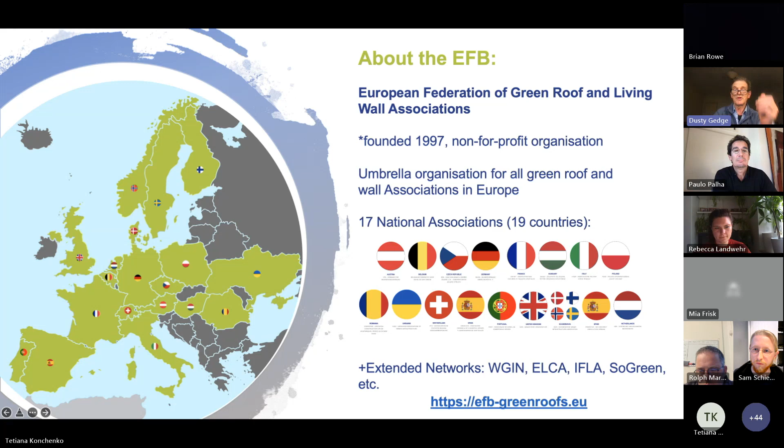Could I get that slide? That is the Federation, so you understand who we are. We're the European Federation of Green Roof and Living Walls Association, founded in 1997. It's not for profit, and it's an umbrella for all the national associations that exist in Europe. We've got 17 national associations in 19 countries, because we have the Scandinavian Association, which wraps up several of those countries. We also have extended networks with WGIN, ELCA, IFLA, SoGreen, etc. There's a link to the website, efb-greenroofs.eu.

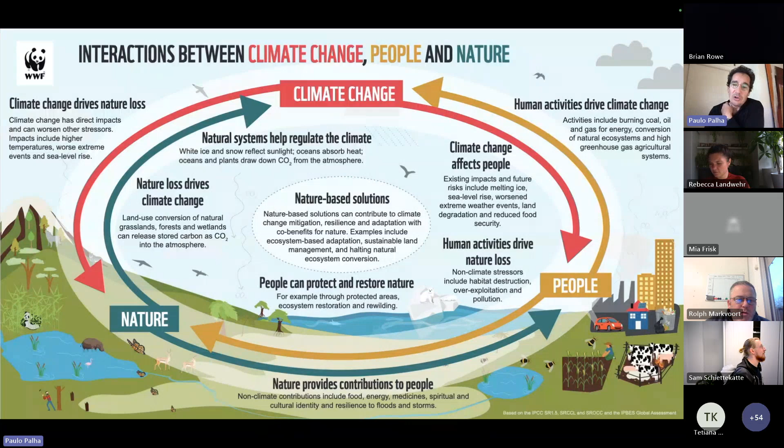We are interdependent, and all the presentations that we will see are really about these links between nature, people, and climate change. This is interlinked, and we feel the consequences very tough in this moment.

In every project, maybe some people say, oh, the city is too dense, it's impossible to change. But my message is that it's possible, and not only possible, it's mandatory to do it right now, because the goals that we have for 2030 and 2050 will be achieved in each of the projects that we are doing now, every day.

So we have a social and environmental responsibility as engineers, as architects, as landscape architects, urbanists, biodiversity experts, and so on, to address these issues in our cities.

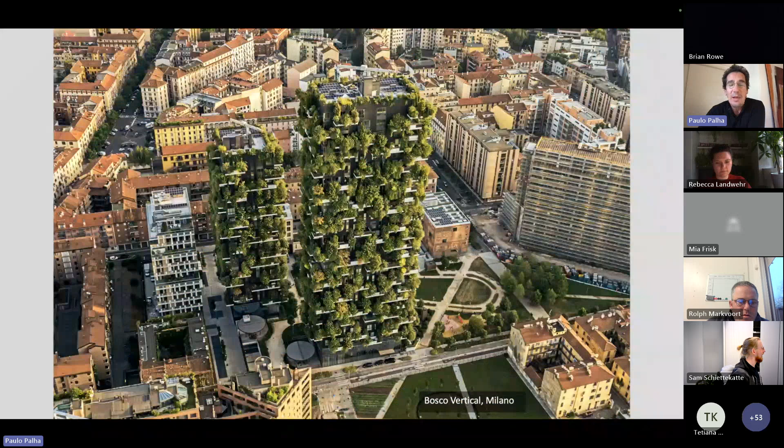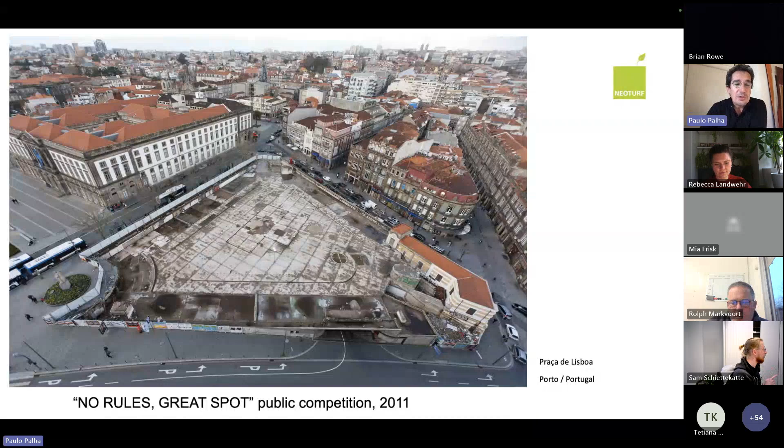Also, as we see here in Praça de Lisboa, that was an ugly place without any square meter of vegetation. And at the end, what we have right now is a big natural area, one of the most visited sites in my city, in Porto.

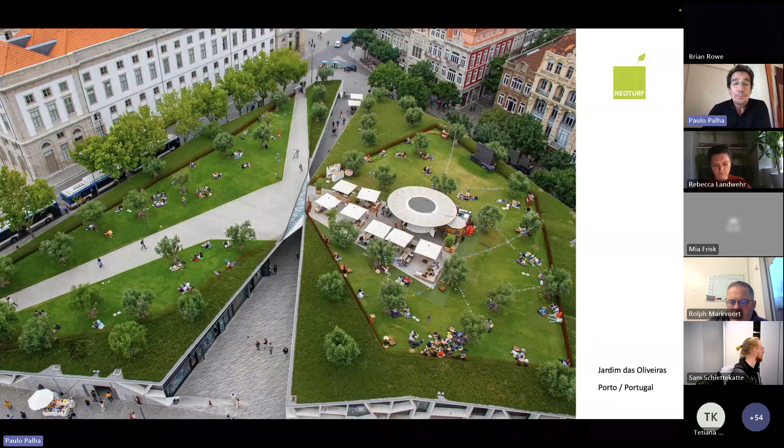So what I bring you today are first of all these important conclusions: we really need to do it right now. Otherwise, the problems that we are facing as a species, as Homo sapiens—we are just one more here on this planet—will be very tough for us, and can have really bad consequences on our way of living.

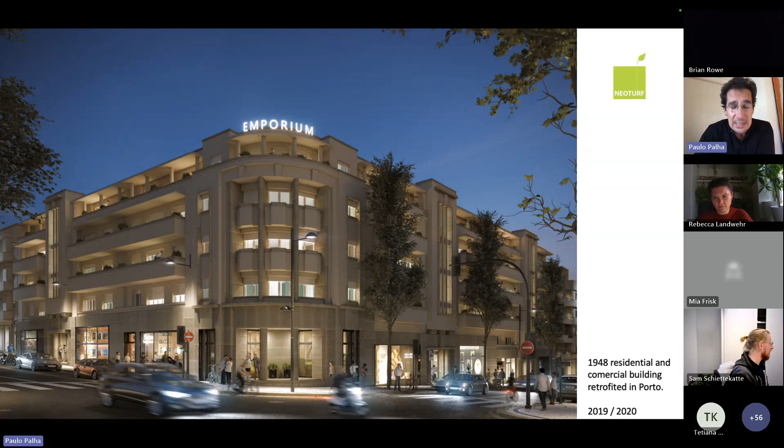Okay, reaching this project, Emporium. Emporium is in the city center of Porto, an old building, a very beautiful building that was bought by a real estate investor, and the idea for him was: okay, I have 25% of this courtyard, with these ugly garage covers inside, and I want to do something different.

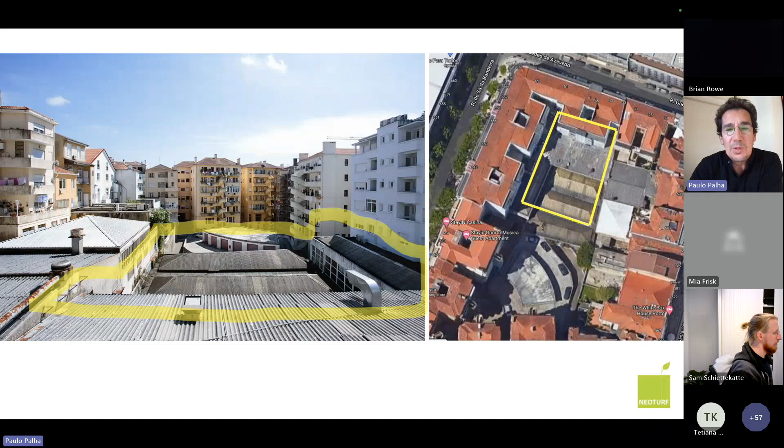I want to bring nature inside this plot, and this must be part of the sales strategy for this new development, but it is a refurbishment of a very old building.

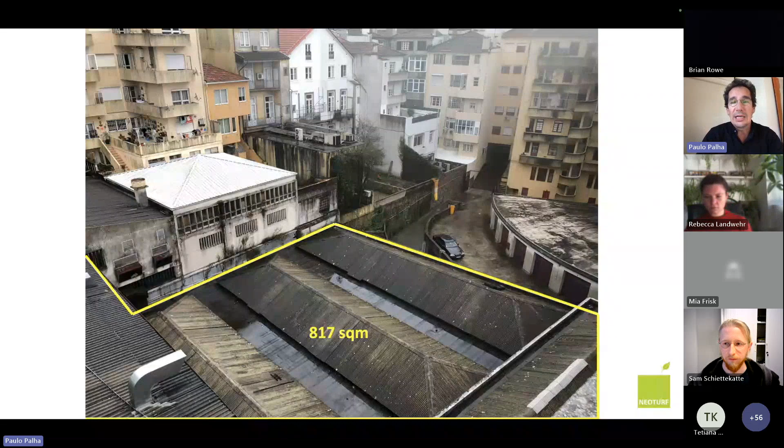So we had a little bit more than 800 square meters. First of all, we engaged very closely with the structural engineers to understand how this could be possible, and also to understand the loads that this slab can handle in the different places of the slab.

So this could really inspire our design. And this is one of the first messages: sometimes we try to force the structural engineers to give us some structural ability, but the most clever thing is to work with them and understand the ability of the slab we already have, and inspire the design of the garden in line with these possibilities.

So we understood very clearly in the first drafts where we could put the biggest trees, because we could have a pillar behind this part of the slab. All the design was inspired by the building, the age of the building, and a little bit Art Deco too, but mostly inspired by technical issues like the load ability of this slab.

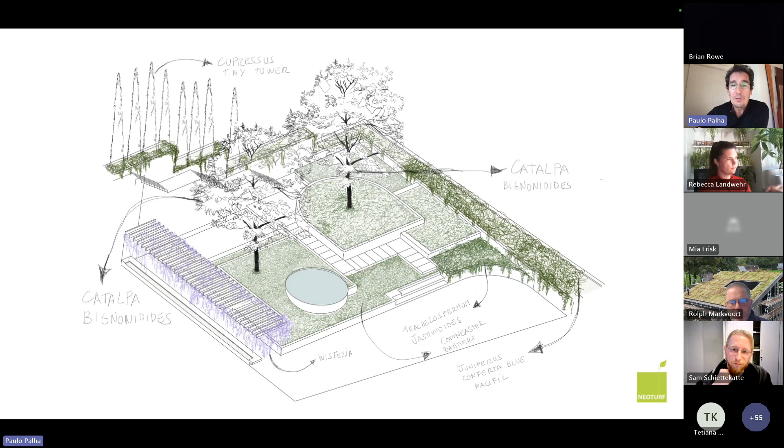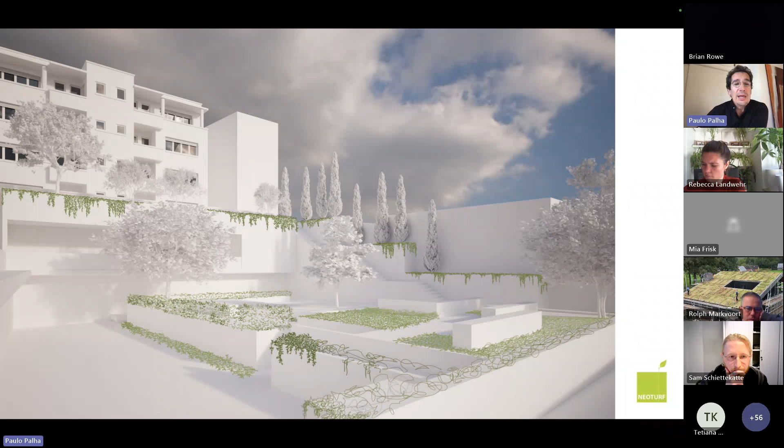So we were trying and making sketches of the possibilities that we had, always in line with this in mind. The idea was really to develop a garden that could address the feelings of nature in the different seasons - a lot of flowers in springtime, autumn colors, very green in the summertime, and also to have shade and a cooling effect for the city.

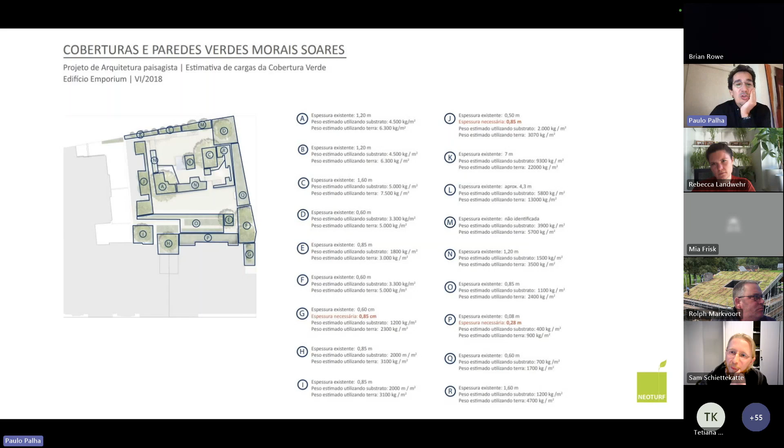Here I can share with you this slide, also from the beginning of the process, when we were having discussions with engineers and architects, to give you an idea of the amount of substrate we were using, the depth of the profile, which was between 1.6 meters and 0.6 meters, so 60 centimeters, and also the loads that we needed to really talk about and see if this was possible.

Also, a big question since the beginning was the drainage, how we could do it. We presented two possibilities. One was a linear drainage, building everything over a drainage board that could handle all these structures.

And the other possibility was to work with these plantation areas as individual plots with their own waterproofing and their own water outlets. What prevailed at the end, and what was better for the hydraulics and also for the construction, was to do it in an independent way. So we used linear drainage systems inside each of these plots.

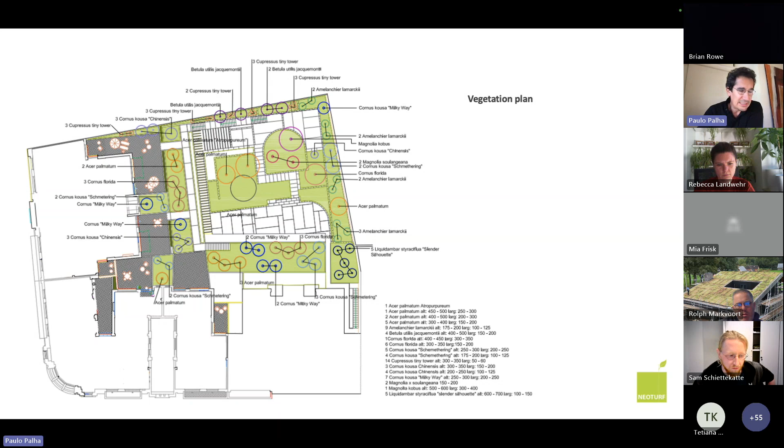We also started developing the botanic scheme, very inspired by the seasons, but also very inspired by Porto - the local botanic, or the usual botanic, even if some species are a little bit exotic, but very much with a seasonal aspect. Then we developed the first 3D images.

These are 3D images just to support also the sales team. We started presenting the concept of the building, and it was a huge, very good reception on the market. It was almost sold out when these images started being presented - only some shops on the street level were still available to buy. So this was really a very good strategy for the real estate company.

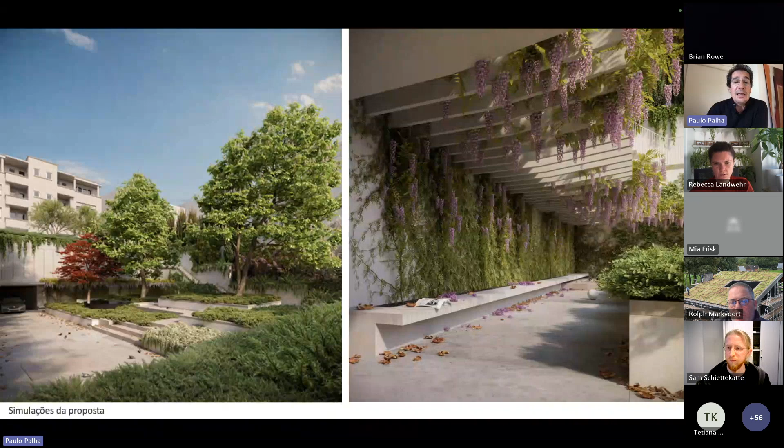This is something I would like to highlight: nature-based solutions are very important because of the ecosystem services we need, but they can also be a very good strategy for the economic value of the properties, as was the case here.

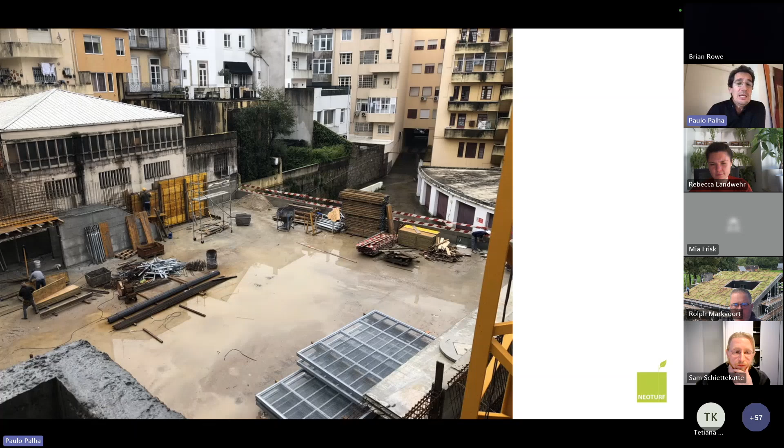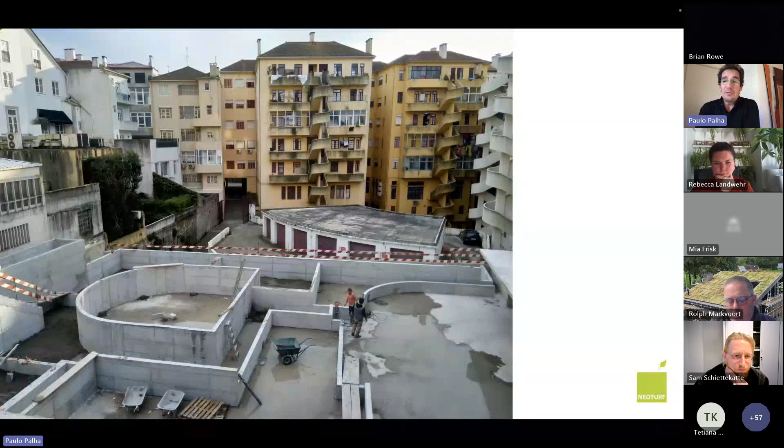The beginning of the construction had a lot of rain, but as you see, we start seeing structures with the design of the garden we proposed - the big tanks, the big plantation areas already in place, and the openings on the walls that allowed us to make connections not only with drainage but also with lighting and irrigation systems.

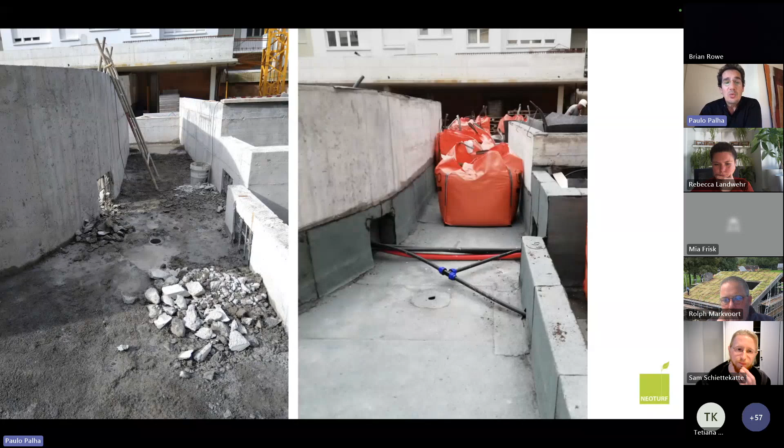After this, the waterproofing was done - a 2-layer asphaltic waterproofing with an anti-root last layer. Then the first thing we did was install a protection mat over this waterproofing.

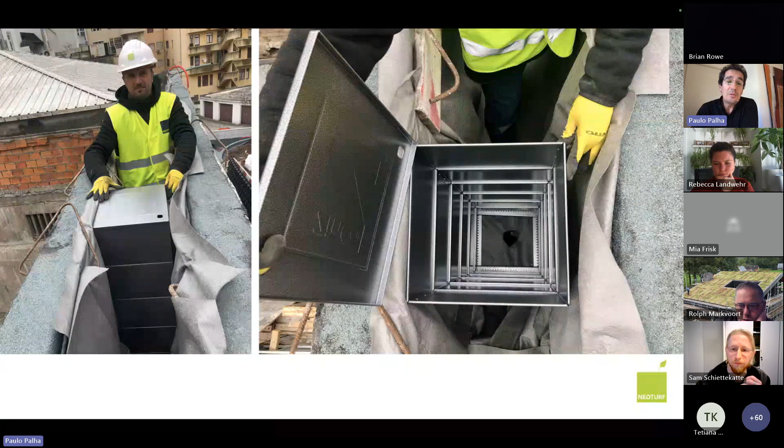Then inside each of these plantation areas came the drainage element, and in each of these areas we wanted at least 2 water outlets - even if it's very small, we always want at least 2 water outlets available. All the outlets must also be visitable, so we can understand if everything is draining properly, if the water is going out as it's supposed to.

Here you see the substrate arriving. We didn't use soils - as you know, multi-layer systems must avoid large amounts of clay, fine particles, and silts. Small particles less than 0.063 millimeters in diameter can clog the filters and cause big problems in the medium-term future. So we avoided this with technical substrates completely free of this type of particle, adding some mineral and organic parts, in line with the FLL guidelines.

We just changed here in Portugal somehow the granulometric curve - we have a little bit more fine particles, and also more organic content in these intensive green roofs.

We work with a little bit more organic approach than is stated in the FLL guidelines. By our experience, it works better in our climate conditions.

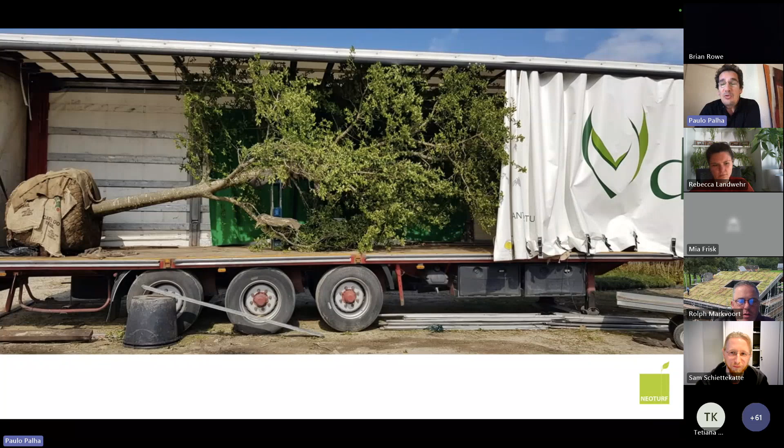Then the big elements, the vegetation, started arriving. It was very emotional because people were in the first lockdown, really inside their flats without the possibility of going out. They started seeing big trees arriving on the spot, and so many people were clapping on the windows and taking photos of what was happening inside this courtyard, because for the last 70 years they just looked at gray and ugly areas.

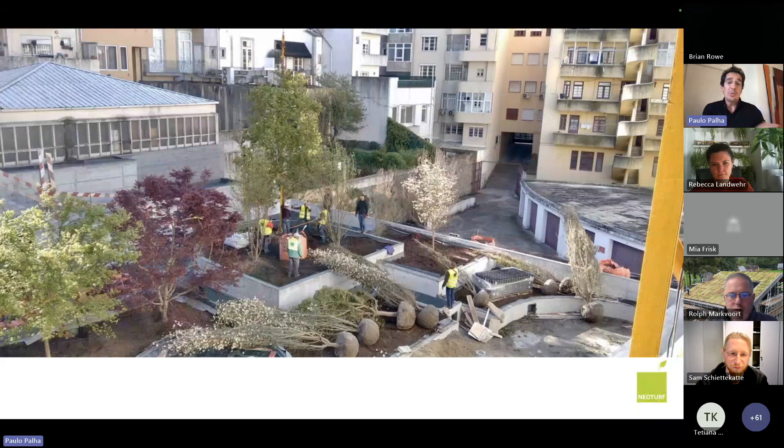It's important to highlight that these big trees were prepared for months with the client. Even before the completion of the construction, the vegetation was already being prepared, because transplanting these big ones is always a big challenge. We were lucky because we didn't lose any of them, so it was 100% a success of transplantation.

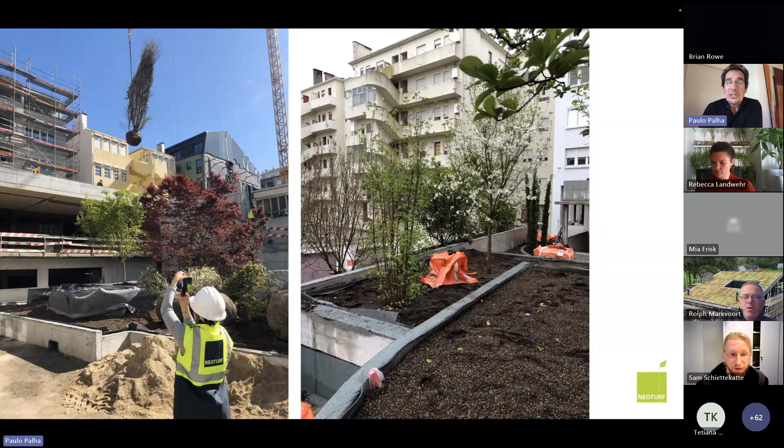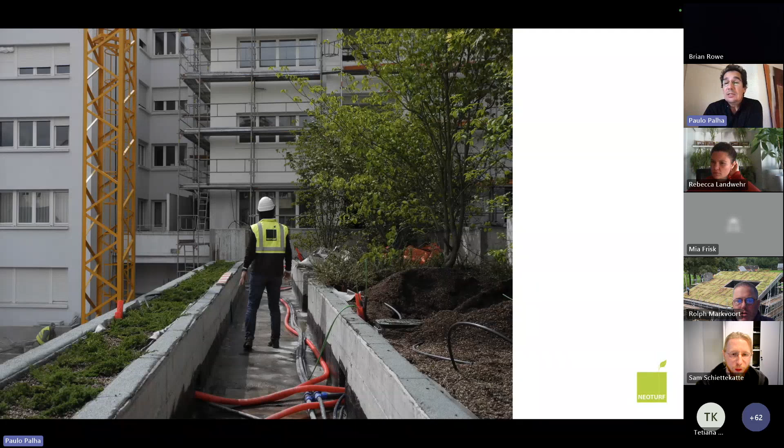Here you can see the technical pipes and so on that were connecting all these garden areas. And now you start getting the feeling of the finishing of the garden. I think I have some more to finish the presentation.

This is only possible because for the last 25 years we've built a very strong team at Neoturf, and we have a very dedicated team, so I'm really happy to be part of this.

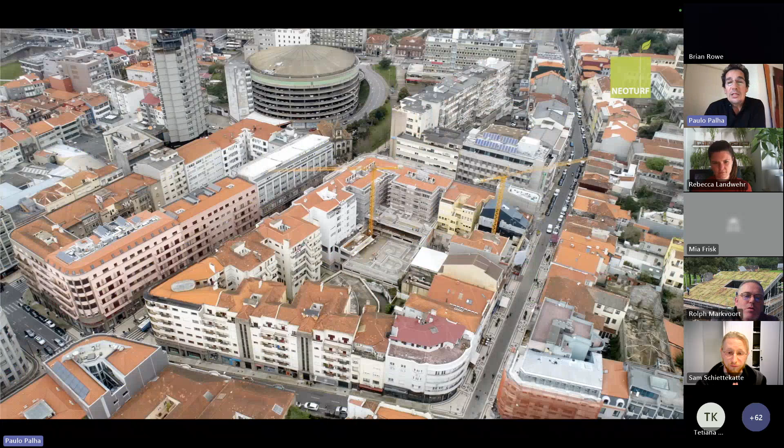Just to finish, I'll share with you this time-lapse video that shows a little bit of the process of this requalification.

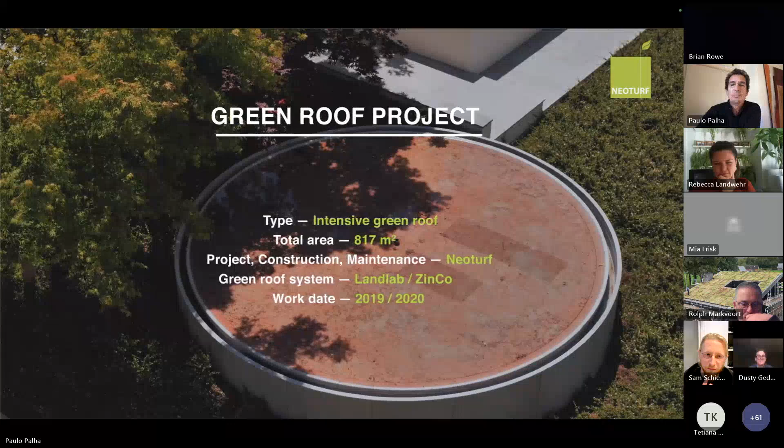I'd like to take 3 points from that. Structure is key, not only adding value to the city, but also to the client - obviously they get value because people want to come and stay at the Emporium. I really like that point about social value, which certainly will come up in mine, of people in the surrounding area suddenly being able to look down on vegetation and soil.

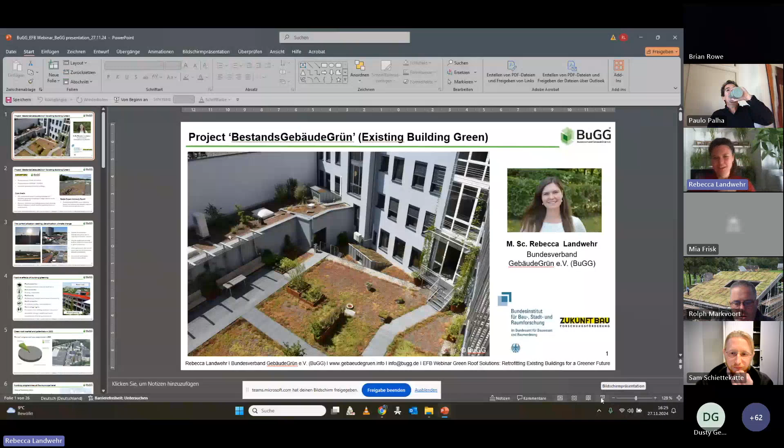My name is Rebecca Landwehr.

I'm working for the German Association of Building Greening, and I'm also one of the vice presidents of EFB. Today I want to show you a project we are actually working on at the moment, called Bestandsgebäude Grün in German, and in English it's called Existing Building Greening. As the title says, we are focusing on the retrofitted greening of existing buildings.

This project is funded by the Federal Ministry for Housing, Urban Development and Building in Germany. It's a research program called Zukunftbau, future building. We started in 2022, and we are close to the end - it will finish in December this year.

Our core thesis - we had two, before we set up the project - was that we have a lot of potential areas in existing buildings for retrofitting greening that we don't really use often, and there's a lot of unused space at the moment. The second was that we have a lack of planning aids to implement this in already existing built-up areas, for planners, executors, and also building owners.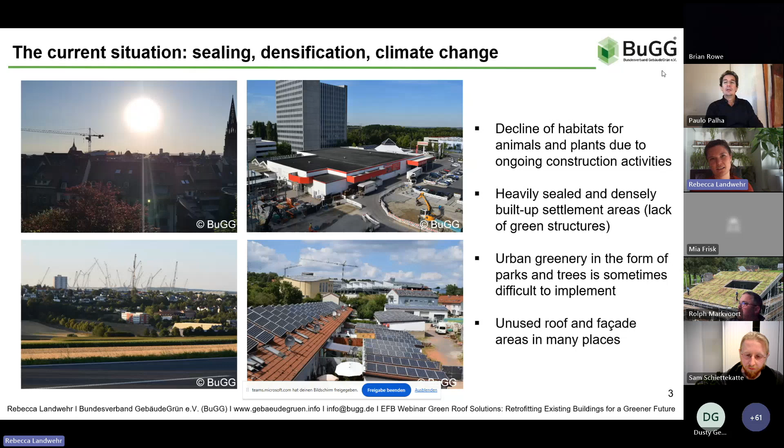So we need a different approach. We see, like in the picture on the right side, many unused roofs and unused facades that could take part in that game of building a greener environment in total.

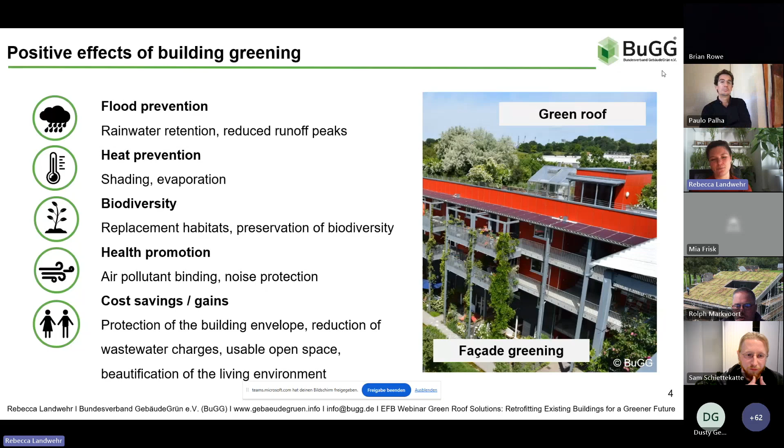So what are the effects that we wish for when we create building greening? The first thing is flood prevention, especially with green roofs, heat prevention with shading and evaporation, especially with facade greening. We want to strengthen our urban biodiversity, promote health, and also have cost savings or gains. For example, when we think about protection of the building envelope, we reduce wastewater charges. When it comes to intensive green roofs, we also create usable open spaces, like we've seen in the presentation from Paulo. And for sure, we make a better living environment for everybody.

To get you into some numbers of the German green roof market, we are nearly publishing our next market report, and these are the new numbers. What we could see is that we have a new flat roof area in 2023 of 60 million square meters, only flat roof, and the part of it that has really been greened is only 10 million square meters. This number is already really, really big for German relations, so it's like 17% of the total flat roof area that has been implemented in 2023.

When you look at the map of cities that fund green roofs and green facades, we also have a rising budget to implement green roofs and green facades in existing building areas. So we could find for Germany 146 cities with funding programs for green roofs, 113 cities with funding programs for facade greening, and also regions or districts that create those funding programs. The aim of it is really to offer financial support for private people or also enterprises, businesses, to make their environment more green. This is a budget that rises every year, and we really need to get this money into implementation.

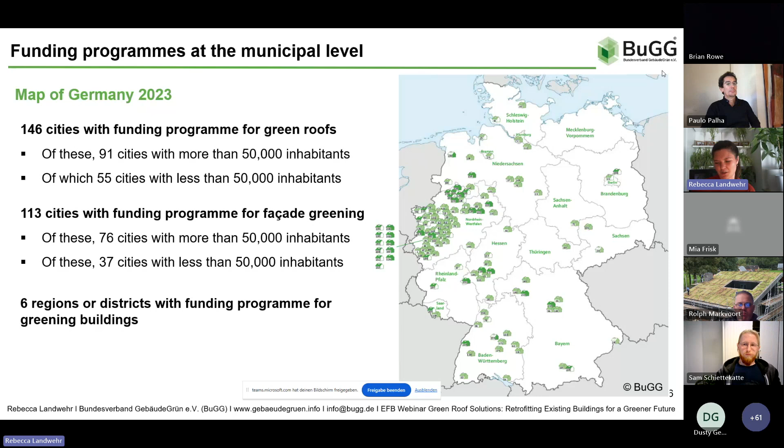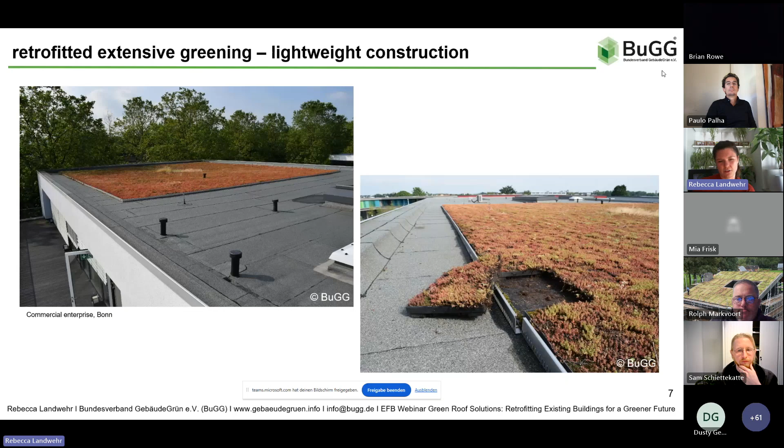We also have different approaches in retrofitting roofs that don't really have the statics, for example. There are lightweight constructions, an example from the city of Bonn. But if you have the statics, so the load reserve, we can also do extensive and intensive green roofs and facade greening. This is an example from the city administration in Kassel, a city in Germany, and they want to create this garden as a presenting garden for people to show the possibilities of green roofs and green facades.

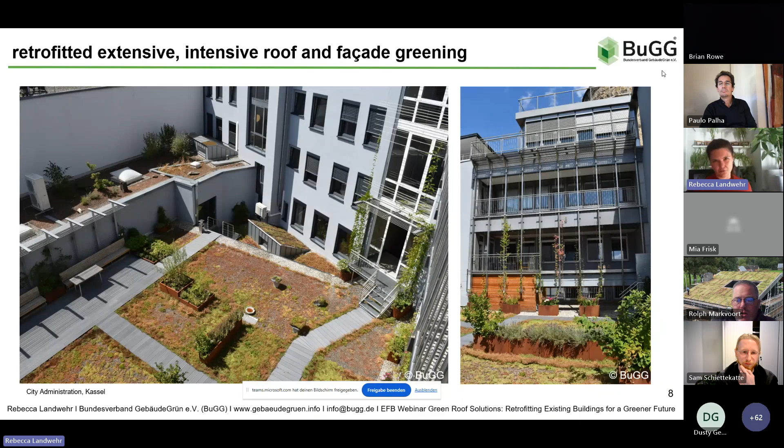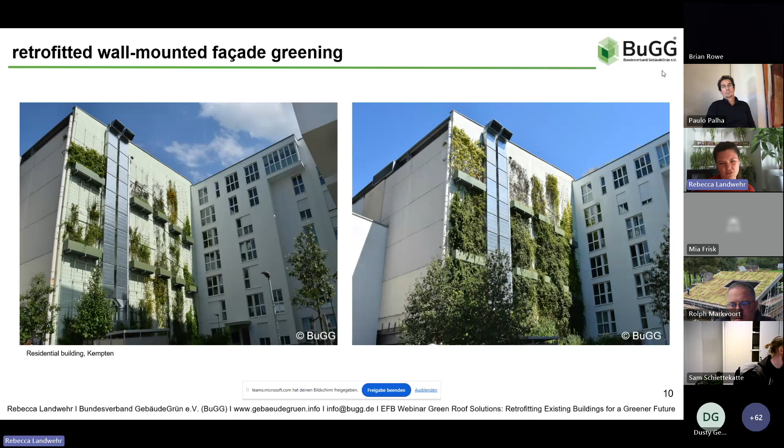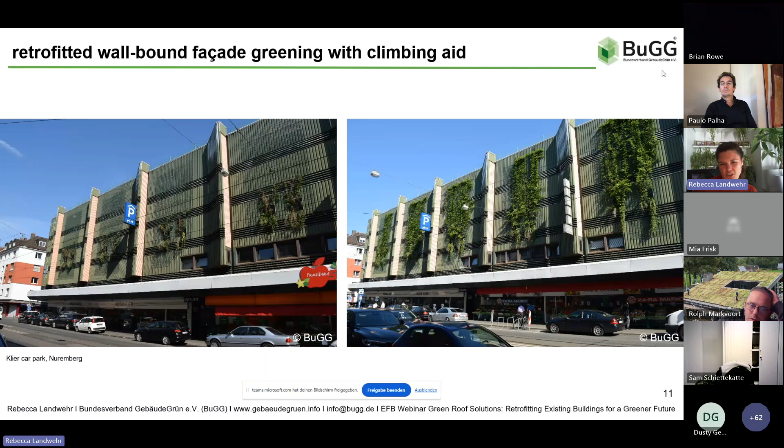And for sure, there are areas or buildings that have many square meters without any openings, like windows or doors, that are possibly greened very easily, like this car park in Nuremberg. So we do have a lot of potential areas. We all know the planning principles for green roofs, just to point some out: statics, root protection, drainage, irrigation, fire protection, and so on. When we have new construction, we can plan them more or less pretty easily in the whole process.

But when we work with existing buildings, we have to work with what we've got. So there's a different thinking approach when it comes to those building areas. Most of the time, we have a more complex planning process that leads normally into very individual solutions per building, and sometimes that also creates higher costs.

And the questions that we had, there were many. Just to give you some examples: which groups of people are involved in the construction of retrofitted greening? What is the procedure for testing the suitability of the roof, waterproofing of a facade wall for retrofitted greening? How are the official requirements? How do roof repairs and energy efficient renovations complement each other? And also, what are the funding opportunities that we have?

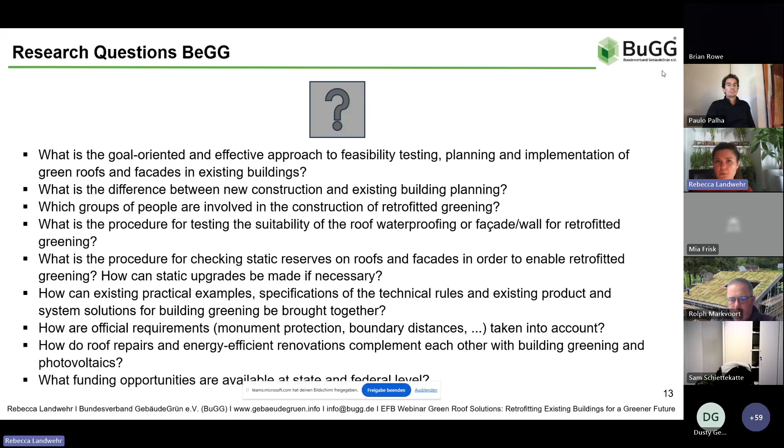We said we need 3 big project objectives with this project. The first one is we need checklists and working aids for the planners, for the constructors, and so on, to check the feasibility of green roofs and facades in existing buildings. Then we want to develop a comprehensive guideline with best practice examples. And the third big point is knowledge transfer, to get this knowledge into the market, to work really cost effective in that point.

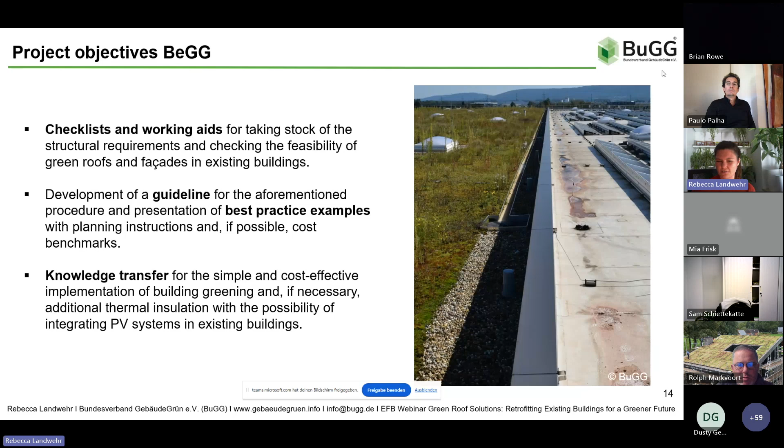So what do we do? The first thing was a very big general survey. We did this in 2022. We contacted 3,000 people, members, research and teaching institutes, cities, associations. We got 92 answers, that's not too much - only a response rate of 3%. But the goal was to get an overview of the most important aspects of renovation and retrofitted greening of buildings.

And then for specific points, we did expert interviews. What are our key findings? We stated 5. The first thing is that the testing of existing buildings for retrofitted greening is a central aspect, and therefore we need the checklist to get a better view on those aspects.

The second one is it is difficult to make general statements and recommendations for the retrofitted greening of buildings, as each building must be considered individually. So for sure, a lot of people want us to get a general solution for a lot of building types, but it depends on parameters that we cannot really get general statements. That's why we want to work with best practice examples.

Building greening should be able to be advised by all trades involved in the construction process, because starting points for retrofitted greening can be versatile. That's a very important point for us, because we see that there are owners who already have an interest in greening, but there are maybe also building owners who have an interest in solar energy, and you can advise them with the combination with green roof, for example. Or we have renovations going on because of age, and there you can also advise green roofs. So there are many starting points.

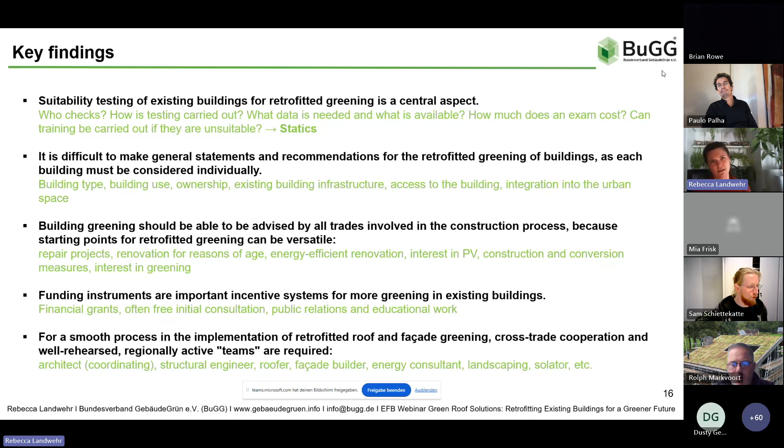And what we also need are regionally active teams. So there's not only the architect and the structural engineer, we also have the roofer, the facade builder, the energy consultant, landscaping. So there are many people working together in one project, and they need to know each other. They have to create a very good environment to successfully reach this greening project aim.

Secondly, we had a BuGG survey that is more object related. So we wanted to collect best practice examples. We did the survey, we got 32 answers - 9 facade greening, 20 for green roofs, and also 2 objects that have roof and facade greening.

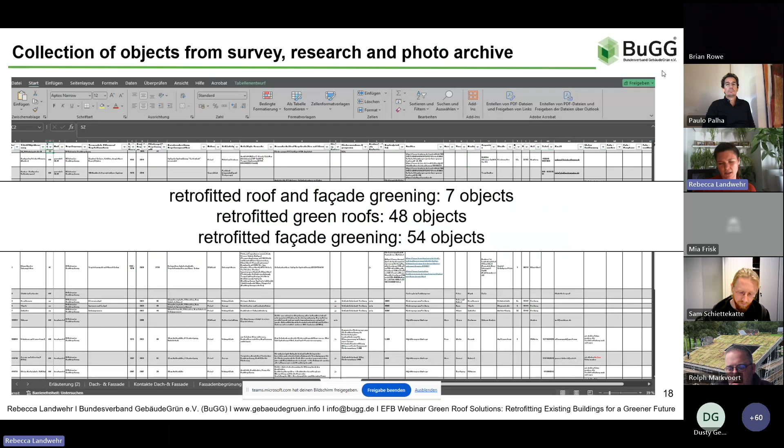But that was not enough for us. So we did more research, and we looked at our photo archive, and we could collect up to now retrofitted roof and facade greening objects - 7 objects, 48 objects green roofs, and 54 objects facade greening. And those are all projects in Germany, Austria, and Switzerland, so in the German-speaking countries. And what we want to show then is an object profile, like you see on the right side.

We have a table with a lot of parameters, and we will pick out the objects that have the best or comprehensive data information - for example, what year of construction it was, what's the area, how was the duration of the planning and construction measures, the cost, the promotion, the motivation, and so on.

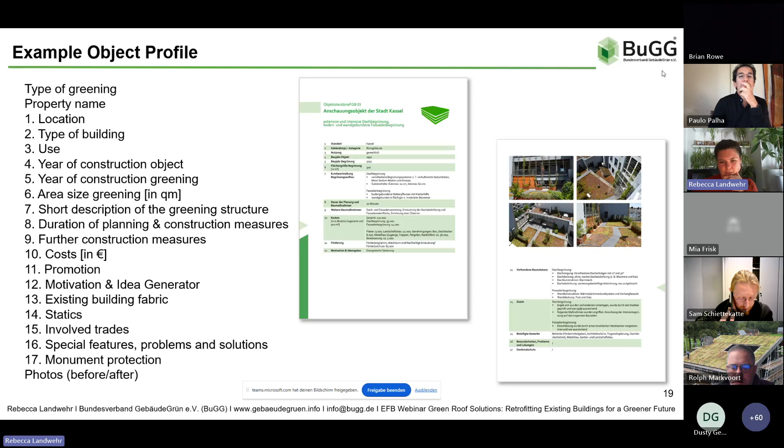And then we will create a 2-pager for each project to show the outcome. This should be an example for planners to strengthen the whole motivation for building green, and maybe they can also show up there and get a little tour.

Another point that we did is we created checklists. That was an outcome from an internal BuGG project group, so from our members themselves - a group of 10 people working together to get a checklist for the first stock taking of a building, to collect the first information for all trades involved, so everybody is on the same level. That was also a big point.

Then we said that the suitability testing of existing buildings is a very central aspect, and we pointed out two: first is the building physics, and the second is the statics. We commissioned a contract to planning offices with the aim that they should answer a questionnaire to assess the role of building physics or statics in retrofitted greening of buildings.

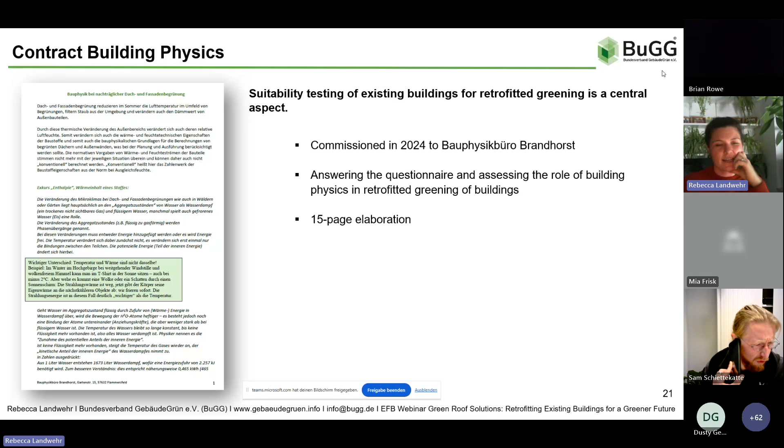All the information we get from there, we will also implement in our guide. What we want to do in the static part is have a static evaluation on building types. Normally you always need individual solutions, but maybe we can do a generalization at that point - all of this is still in development.

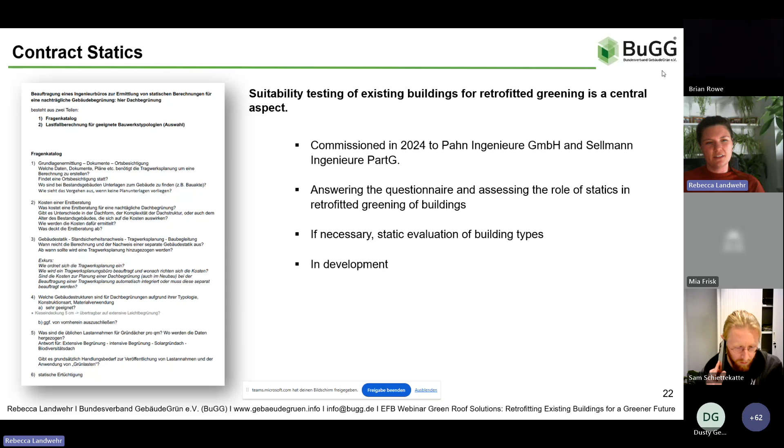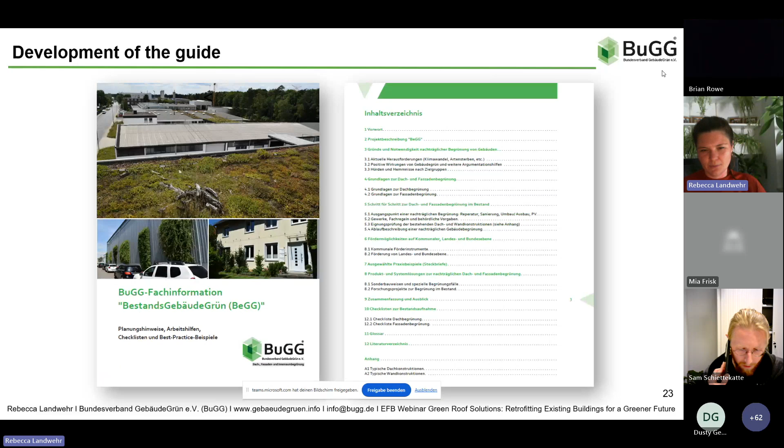In total, we will have our guide. Up to now, we already have over 100 pages, still collecting information because it's just such a big topic. What we are doing right now is completing those object profiles, the work aids, the checklist, and the guide, and we plan the release of this in Q1 2025.

We will also have a congress going on only about existing building green in May in Berlin, to show the guide but also to discuss the points we mentioned - the need, potentials and effects of retrofitted greening, obstacles and hurdles, and solutions and practical examples to show that greening the built environment is possible.

It's just, if you see how many buildings we create new and how many buildings we already have in stock that are possible to be greened, it's massive. And with that, I want to thank you for your attention, and if you have questions, let me know.

Thank you very much, Rebecca. I've got 4 points from that: excellent overview of the key issues in retrofitting at a national level, incentives are important which I'll bring up too, best practice examples, and communicating - a big conference about it, presumably communicating to all the various cities in Germany. Thanks very much, Rebecca.

I presume yes - obviously you've been introduced to me. I'm currently the International Ambassador for the European Federation. I'm also a co-founder of Gentian, which will get a mention when I talk about mapping, and I'm founder of livingroofs.org, which was the first UK-based website campaigning for a London and UK policy. I've got a picture there because Rebecca mentioned there's a lot of interest in retrofitting solar, so I'm going to put in a case study of a retrofit project which involves solar and green roofs. But I just wanted to start with a little introduction.

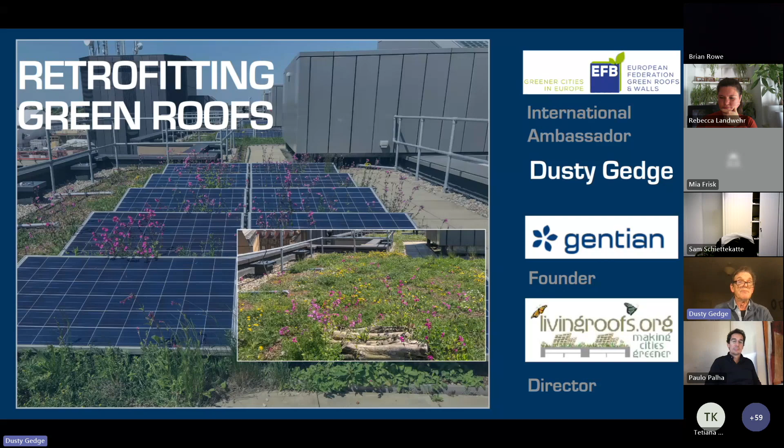As I was looking for slides making this slideshow, I realized I've done over about 200 retrofit projects since about 2002. This was the first retrofit project, which set up 2 green roof research laboratories in 2002 - one was at London Zoo and one was at Canary Wharf.

For people not familiar with roofing, the one at London Zoo was on a warm roof, which I'll explain later on, and the one at Canary Wharf was on an inverted roof. Certainly in the context of UK cities, we have a lot of inverted roofs - there tends to be less on continental Europe, which can actually change the narrative of retrofitting.

But that was in 2003. Obviously, anybody who knows my work knows my approach to green roofs is delivering biodiversity. Out of that research project, we created this guidance, which is the guidance for how you deliver biodiversity in green roofs across the United Kingdom.

It's based upon work in Switzerland, which I always like to celebrate. And for those familiar with biodiversity net gain, it's also the basis of the biodiversity net gain metric in England. Way back in 2005, we were talking about our research in the Canary Wharf area, a financial district of London, and I managed to get the highest green roof put up in Europe at the time, on 32 stories, for biodiversity, which is a story in itself.

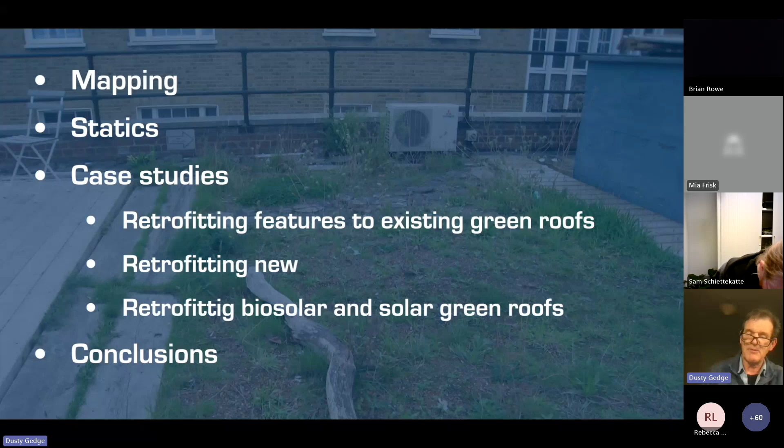Certainly across a lot of Europe, in parts involved in the Second World War, a lot of housing estates built after the war have small buildings - we call them pram sheds and bin sheds. They're actually small roofs, but a lot of them could be greened. And I'll just wrap up with some conclusions, thoughts, and advice.

So where to start? Well, mapping is quite important, because I read a lot of papers saying there's all these flat roofs all over our cities, but do they actually have potential for retrofitting? If you can map and identify roofs most likely to be retrofitted, you can save a lot of money, because you can select those to get an engineer and a waterproofing professional to sign them off. Also, from a city perspective, it provides an understanding at city level of what is possible.

It relates to what Rebecca was saying about flat roofing in Germany, and how many of those roofs are actually greened. I actually started doing this manually, way back, for a report I did for the London government to try and get a green roof policy. There's a whole chapter about retrofitting, and it's often quoted now in the UK that 32% of central London can actually be retrofitted - technically, tomorrow - which I'll talk about when I get to inverted roofs.

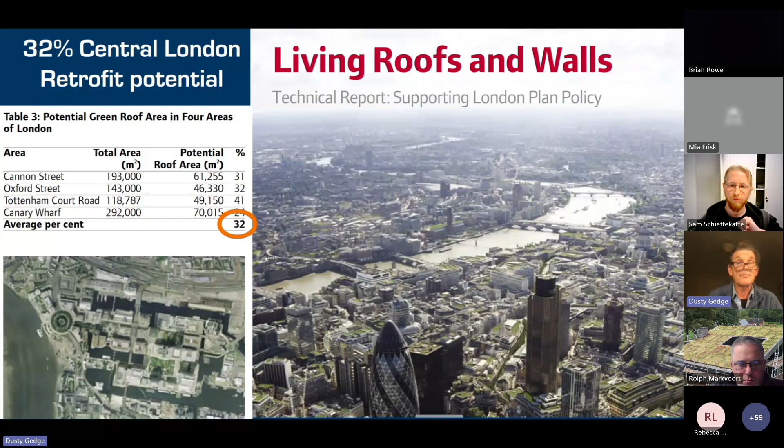So the mapping differentiates between what is known as inverted roofs and warm roofs. Inverted roofs are used quite a lot in the United States and in the United Kingdom, less so on the continent, as I've already said. Essentially, they're roofs ballasted with shingle or paving. For people less familiar with roofs, an inverted roof is where the insulation is on top of the waterproofing, and has to be ballasted with a weight of 120 kgs per metre squared, which is equivalent to an 80mm green roof system.

Warm roofs are very hard to assess remotely, and often, depending on the year they were built - if built in the 40s or 30s, they're highly likely to take a good green roof in the London, UK context. But if built in the 60s or 70s, they were so lightweight you shouldn't even really walk on them. I want to make that clear, because you can be a bit too precise otherwise.

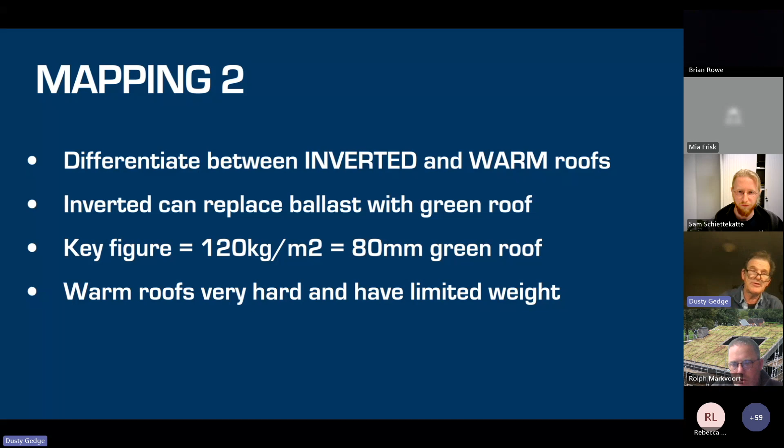I wanted to put some examples of what my company, Gentian, does - it maps urban green infrastructure, and we've created AI that can identify inverted roofs. I'm going to start off outside of Europe, and I know Christine Turing is here because she said good morning from Canada in the chat.

Those dots are inverted roofs across Vancouver, and the dark dots are multi-story car parks. Obviously, a multi-story car park can have a garden, like Paulo showed, because of the structural capacity - they can often take a lorry, but they can always take a car, which is pretty significant weight.

I've got a little animation so you can get in there and see. We've done a lot of this in London based on work I did over the last 15 years, mapping various neighbourhoods in London for retrofit. This is just one of our local authorities - a municipality equivalent to the 13th district in Budapest. These are their own buildings; there are other buildings in this borough that could be retrofitted, but this is their own buildings.

If you look at the picture to the right, the top one, you can see the shingle ballast highlighted in white - that's a ballasted roof. Again, you can see a multi-story car park, and the bottom picture is an inverted roof with shingle ballast on it. That shingle ballast can be removed and at least 120 kgs of green roof, 80mm system, installed above it. That's technically correct, but in a situation where retrofit has to happen, it does need to be signed off by a fully qualified engineer, just to make that clear.

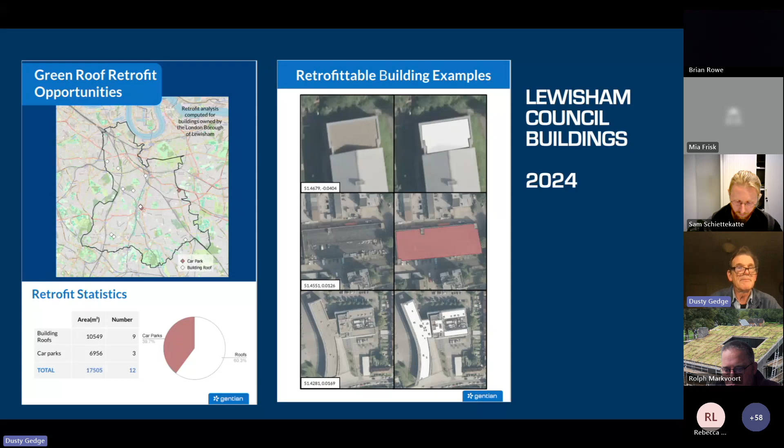This is another district in London where we looked at the central activity zone of the London Borough of Hammersmith and Fulham. There were 61 retrofittable roofs, about 71,000 square meters, a significant area in central London, and one retrofit car park. This is all done using AI.

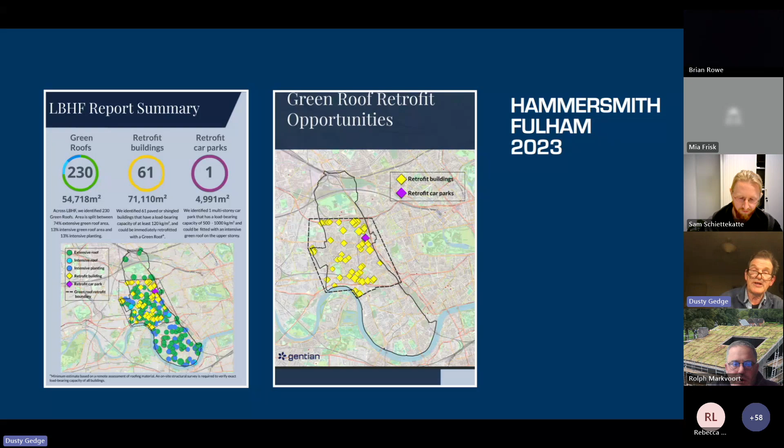Finally, this is in Nice, in France. We were asked to do a study there - in Southern Europe they do a lot of gravel roofs, but it's very difficult for us to be clear exactly what the statics are. We identified gravel roofs, and if they perform like inverted roofs, which I suspect they don't, they could be retrofitted.

Going to Switzerland, historically, due to fire regulations from the 1930s, a lot of roofs there are shingle ballasted, and again the shingle can be removed and the equivalent of an 80mm system installed upon them. This shows that when you map, you can select and target areas for retrofit incentives, particularly in the dense urban core.

Part of what we also do is give scores for potential uplifts. If you uplift to X, we can give you a biodiversity net gain score, a habitat score, an environmental net gain score for all the other environmental benefits. Hopefully this helps justify the cost of retrofit for private and public sectors. In London, a massive financial capital, there's a lot of interest in retrofitting green roofs for what's known as TNFD.

There's the website, and you can email me if you're interested in that part of what I do. I'm going to give you some examples of case studies - I'm actually involved in 7 at the moment in various guises on commercial and public sector properties. This one is 2, actually.

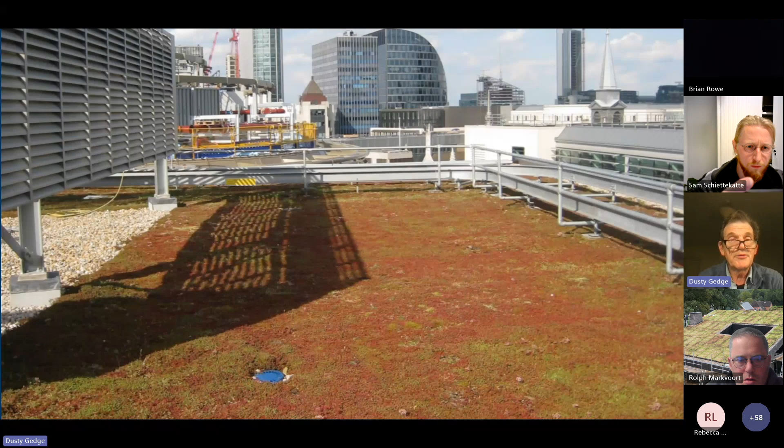The first one was 2008. This was a green roof meant to be installed specifically for biodiversity for the company - it wasn't a planning condition, it was an aspiration of the company. It was a simple 40mm substrate with a sedum blanket on top, but it was on an inverted system. So in 2009, with the staff, we created a series of mounds and seeded wildflowers - native wildflowers, through seeds but also plug plants - and piles of logs, and bulbs. Spring bulbs are very important for early pollinators, and so we did that.

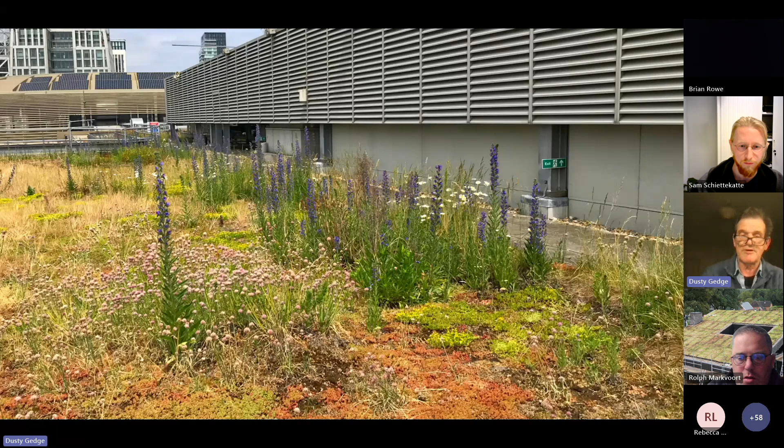This is another one on one of the big four accountancy firms. I couldn't find today the picture of the before and after because I've lost a lot of photographs over the years. But you can see here, this was actually not a sedum blanket, this was a sedum plug green roof system, for those more familiar with the German market. Again, we had the weight and the structure to add mounds, bulbs, native wildflowers, and piles of logs. This now scores very highly in terms of biodiversity net gain under the English legislation.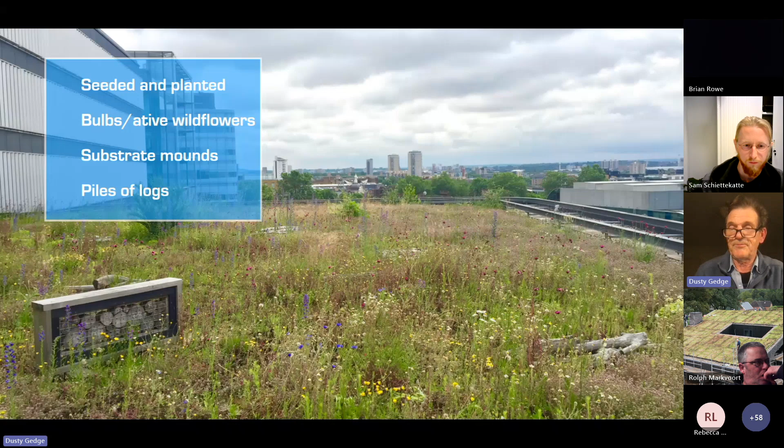There was also what was known as a brown roof, and I was one of the originators of brown roofs. This brown roof had been installed, basically brick and concrete, and had not been seeded, so it had become what is known as a buddleia forest. So we herbicided it and then created these mounds and log piles, and reseeded it with native bulbs and wildflowers. These retrofit features have increased the biodiversity of this roof.

I've been involved in about 6 or 7, maybe 15 of these over the years. So if you're interested in retrofitting features on simple sedum blankets, do get in touch.

This is a paved roof on an inverted roof on a commercial property, again in the City of London. The company's environment team wanted to deliver something for biodiversity, so they contacted me. I unfortunately don't have any pictures of the original roof, but you can see on the right-hand side the paving slabs - where the green roof is now was just paving slabs. The paving slabs were removed.

A 150 millimeter green roof was installed, using what was actually an Optigrün system. The reason we could put in 150, not 120, is because it's only about 4 meters long. We had an engineer who said we could have probably put in 300 millimeters, but they didn't want a garden - they specifically wanted an extensive green roof designed for biodiversity. I think you get a better picture there.

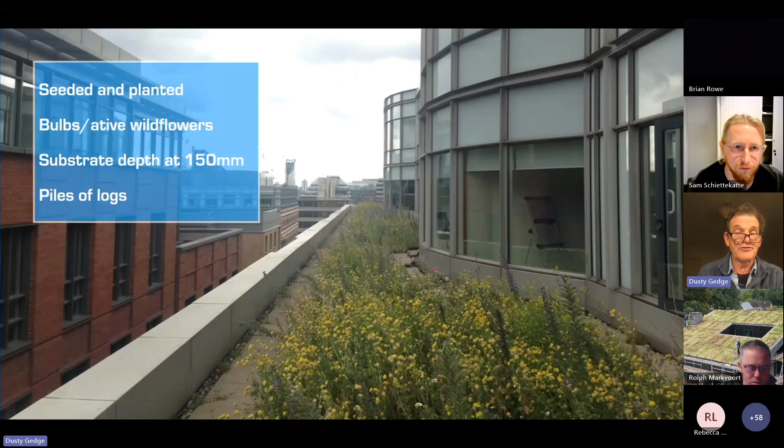But just to add to that, there's a big movement, certainly in London, for using recycled shingle on roofs. So there's actually a market for shingle removed from shingle-ballasted roofs in the construction industry, which gives it a higher value. That can reduce the actual costs of these installations.

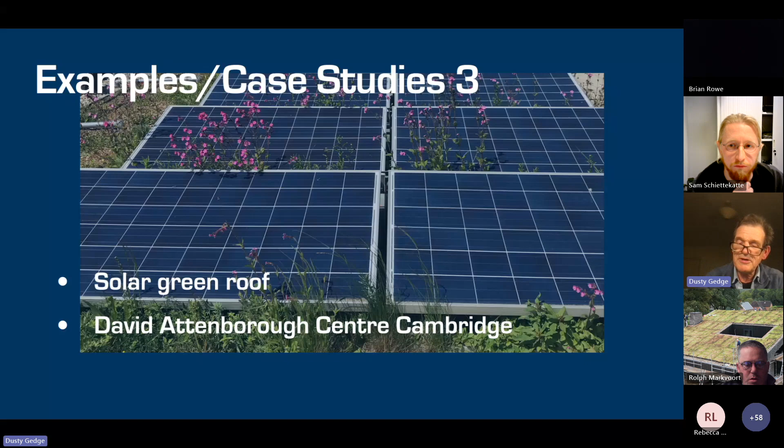The next one - I've got several of these, but I focused on this one because it's actually the David Attenborough Centre in Cambridge, which is quite famous now, obviously because of David Attenborough. The interesting thing about this was it was a retrofit onto a warm roof, which, as I said, is exposed black membrane. It was a 1960s building, structurally very constrained, and we couldn't do any structural uplift. We were pulled in when they were renovating this building to turn it into the David Attenborough Centre, and they really did want a green roof that delivered biodiversity.

So we managed to get a substrate depth of 80 millimeters over the majority of the roof. But it's quite dry in that part of England, Cambridge, so it does suffer in droughts. It is seeded with wildflowers, but we've also spread sedum cuttings on it. Just for anybody here - this isn't a biodiversity talk, but it's actually very useful to mix wildflowers with sedum cuttings, because the sedums can support the wildflowers through the hot periods.

There you can see a log mound and the usual features that are now used when we specify biodiverse extensive green roofs in the United Kingdom.

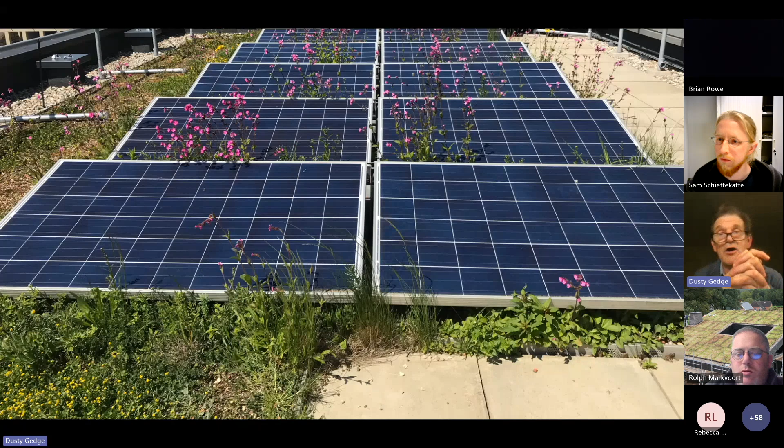But they also wanted solar power, so there's quite a significant area of roof where we managed to get these solar panels fitted in. Now these are what I would call, or we in the UK in terms of our code of practice call, solar green roofs. These are non-integrated solar panels, meaning the solar panels sit on top of the green roof and are ballasted out with pavers underneath.

I want to highlight one issue with this roof and this type of solar mounting, I hope nobody minds: water runs off the solar panel and collects beneath it, which can actually encourage a lot of woody stem plants. Because they're in shade most of the time, they don't die like they do on most extensive green roofs. So this approach can lead to pretty high maintenance costs to ensure the solar panels aren't shaded out.

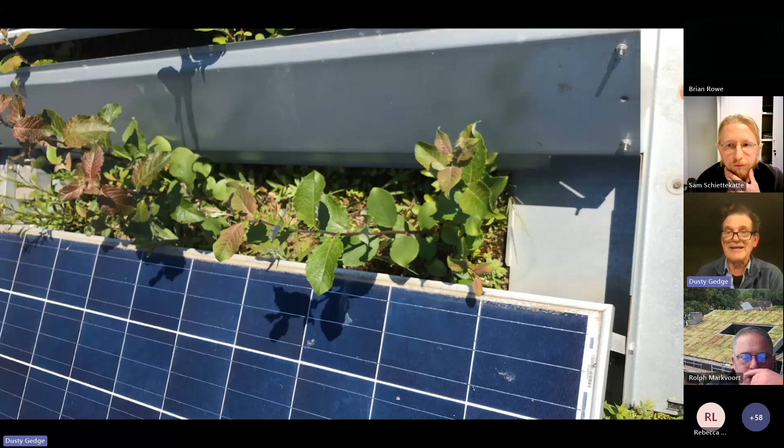My final series of case studies looks at smaller roofs, because I think we sometimes focus at a city level on large roofs, but we have a lot of these across the UK in cities. These ones are bin sheds, but we also have a lot of social housing built in the 60s with pram sheds, where mothers could store their prams when they lived in high-rise social housing. A lot of these buildings are now redundant, but they're actually fit for purpose.

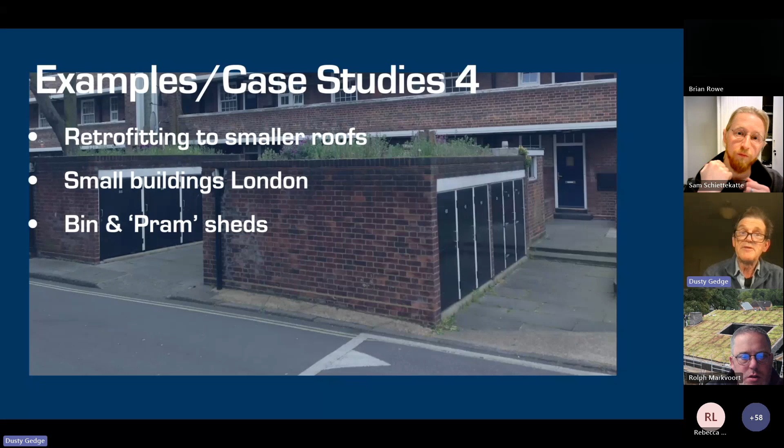This particular one I can't talk about in detail, but a lot of these buildings built in the 60s were actually constructed with quite substantial concrete decks, and the waterproofing is beneath the concrete decks. So you can actually put a pretty good green roof up.

I really liked what Paulo said about the social impact, because I've been involved in about 20 projects like this, and we get a lot of emails from people saying you've made their life so much better because they can look out the window and see all those lovely wildflowers on their bin sheds. I think we sometimes forget that kind of impact we can have on urban populations.

So, simple felt roofs - some of them have concrete decks but they often have good structure. You can see on this one, which was a concrete deck, we've got about 150 to 200 millimeters of substrate with all the general biodiverse features. There are about 10, I think 15, of these on this one social housing estate.

And there you can see it again, 150 millimeters deep with log piles. The one in front, which is not greened, was greened about 2 weeks later.

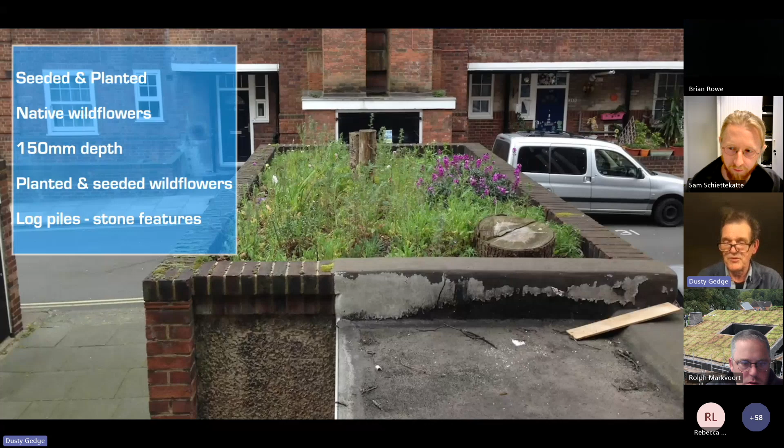This is some social housing built in the 70s, where they weren't necessarily built so strong. These are bin sheds, and there are 4 of these on this social housing estate. So we were a bit weight constrained. You can see nearer the building where there's a walkway underneath, we had to be very careful there, and the idea was that area would just be covered with gravel because of the weight - if sedums decided to grow there, fine, but we really couldn't treat it as a proper green roof.

Because it was weight constrained and it's a simple felt roof, we couldn't be sure it would have been root protected, since felt is not a full waterproofing. So a root barrier was put down - in this case what we call a pond liner, which is root protected, because you put a pond liner in a pond and the roots can't grow through it, else the pond drains.

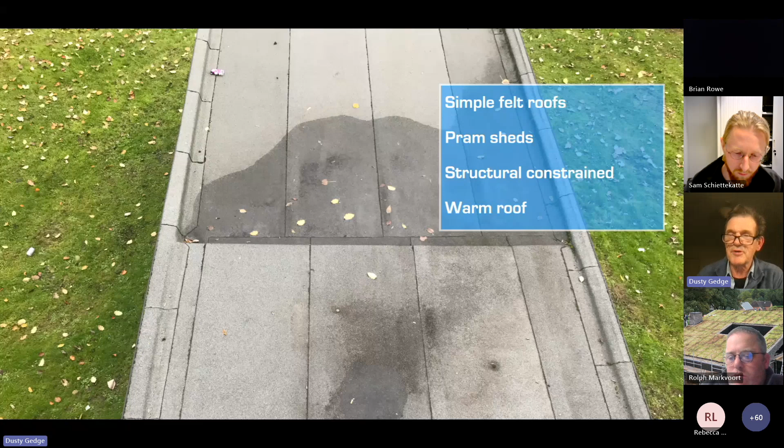We also used a straw base beneath it because the roofs were quite lightweight, and straw bases were often used in Switzerland where you've got very lightweight situations, because straw is really good at holding water. It's very light, and it creates a lot of microbiotic activity which can support the wildflowers.

I visited these in May this year and last year - they were installed in 2018 and they're looking great. There you can see them, a photograph from this year in late May, of 2 of them. I've also got a little video about that filmed back in May, if you're interested in watching.

So I'm going to conclude.

I've got a very specific direction of where I think green roofs should go, and that's always about delivering meaningful biodiversity. But certainly in a London context, I'm writing some guidance now for a local authority, one of our inner London authorities for their housing division, where you've got inverted roofs, always go there first, because you can deliver better green roofs.

I've spent a lot of time - I come from a family of structural engineers actually - telling people, never ask an engineer what green roof you can have. Ask the engineer what dead weight can be put on that roof, or else they'll tell you what kind of green roof you can have, and normally it will be the lightest green roof that you can possibly have.

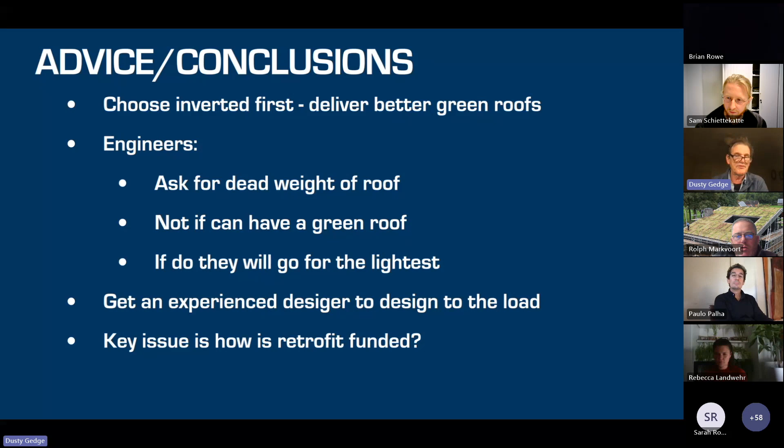One thing I'll pass over lightly, because it's a project I've been involved in for 6 years - I think Paulo is aware of this - is I'm now working with UCL trying to see if we can find a carbon neutral approach that could stimulate real estate to retrofit because of ESG reporting. I don't want to go into too much detail, but that might help retrofit the 32% of London that can be retrofitted quicker.

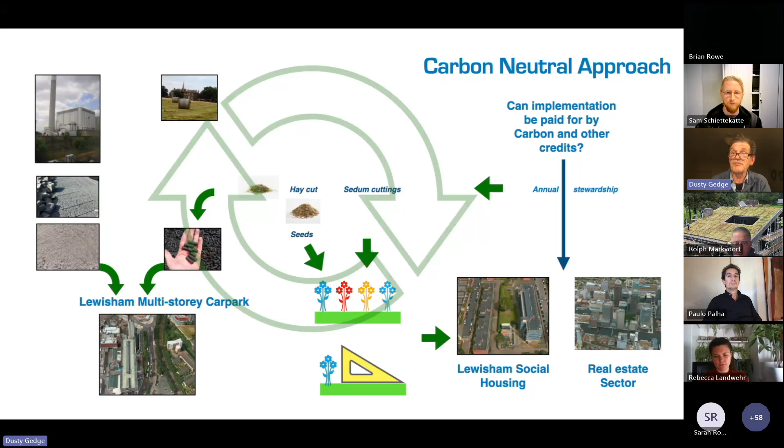And finally, elsewhere in Europe there are processes to get incentives sometimes, but the water industry has an interest in retrofitting green roofs, technically because of intense summer storms, and roofs are source control mechanisms. If they were greened, perhaps that would help reduce the amount of stormwater going into the stormwater system, which is under pressure across Europe, North America, and most of the world. So the water industry is important too.